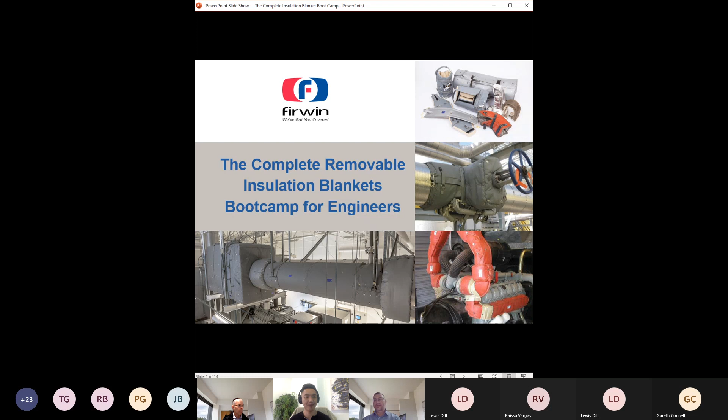We really appreciate you taking the time to educate yourselves in this area. It's not the most glamorous product in the world, insulation. It's the kind of thing that people don't really see. It's best out of sight doing its job, but it's critical. All those who need it understand how important it is on many different levels, and some of those we will touch on during the presentation.

So in today's presentation, we would like to give a general overview of insulation blankets. We're not going to get too much into the technical details. We'd like you to just have a good overall understanding. In the introduction, we will basically be discussing what is an insulation blanket, what is it made from, how's it constructed, just so you have a basic understanding. Some of you may have this knowledge, and I apologize if it's going to be repetitive. It's difficult to aim it at everyone, but we will go through that fairly quickly, and some of the points to consider in an insulation blanket.

We'll then move on to benefits of removable covers. In that section, we'll touch on some of the applications of insulation blankets, what is different about insulation blankets as opposed to other types of insulation. The next two sections, we'll start focusing on what's required to make sure that the insulation blanket that you order will meet your specifications, how to order an insulation blanket, what type of information the provider will be looking for to make sure that it does what it's needed to do, and then we'll wrap it up.

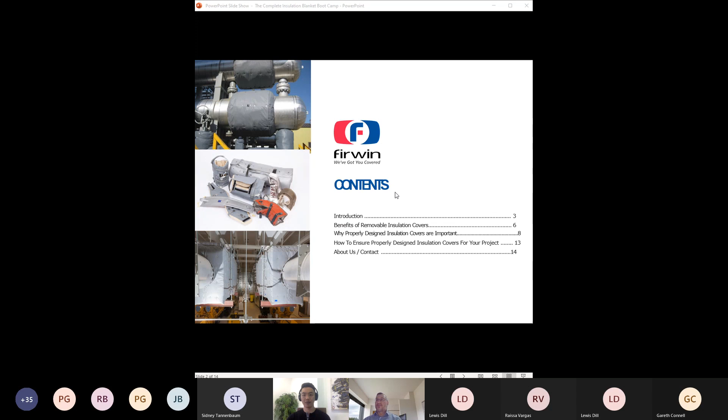Hopefully by the time we leave the seminar today, you'll have a good understanding of what an insulation blanket is, some of the variety that's available in insulation blankets, when to use an insulation blanket, and the type of information that the provider will be looking for to make sure that they can meet your requirements. So without further ado, let's move on to the exciting world of insulation blankets. Okay, let's get started. What is an insulation blanket?

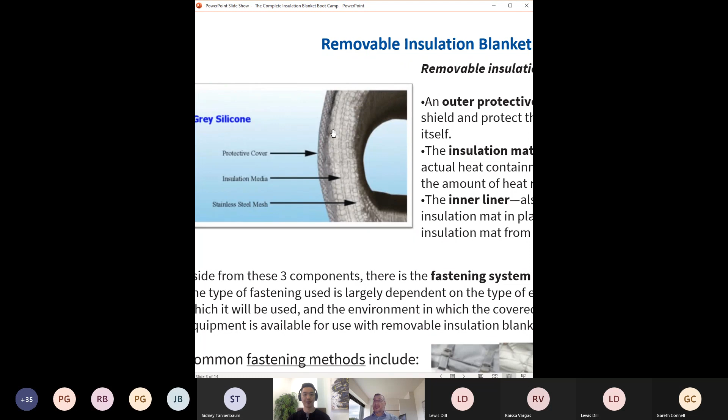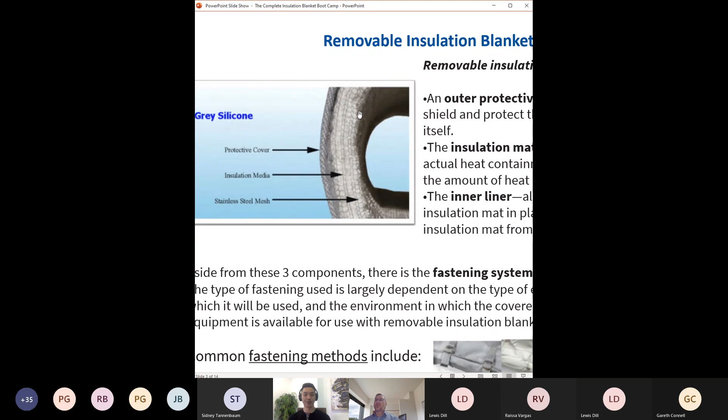So there's all kinds of variety. We're going to focus on what's most common in an insulation blanket, and I'd like to zoom into this visual over here, which gives a good overview of what goes into an insulation blanket. We have the outer protective cover, this gray section on the outside in this photo. We have the insulation material, the actual insulation. Then we have what we call the inner liner, which is kind of what holds the blanket together.

Let's just start briefly with discussing the outer protective cover. There's different terminologies used for these things. It's also known as the cold face of the blanket. That's typically the surface that's furthest away from the heat source, or sometimes could be the cold source, but this is the outside of the blanket. It's designed to shield and protect the insulation, so the main purpose of this area is to protect the insulation blanket.

Some things to take into consideration when choosing or asking for the outer protective cover is, first of all, what kind of heat exposure it's going to be exposed to. Either you're going to have heat coming from the outside, or there's going to be heat that's conducted through the insulation to your outer surface. It's important that that material, as in every component of the insulation blanket, is suitable for the heat that it is going to be exposed to. Other things to take into account: what type of environment is it going into?

Is it going to be wet? Does it need to be able to handle wetness, different chemicals, different fluids? Is it going into a dusty environment where it can become dirtied and has to be cleaned off easily? How much abrasion is it going to be exposed to? How tough and rugged does it need to be? These are all important questions.

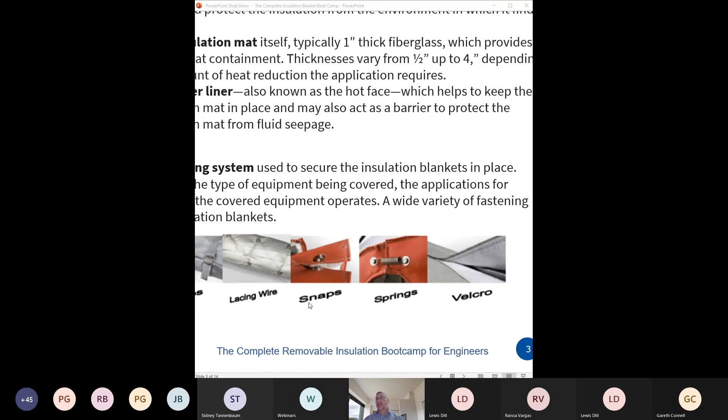And that comes to the last part of the blanket, which is our fastening systems. At the end of the day, the blanket has to be attached to the equipment. So we need some kind of fastening system. Many systems are out there, and Firwin does offer many different systems. Here are some examples. The most common is what's known as lacing wire and rivets or hooks. Essentially, it's kind of like a hiking boot. You just take a stainless steel wire and you wrap it up.

We have straps, snaps like on a winter coat, springs, which is a quick fastening system. Springs attached to one side and you hook it over the other side. Velcro can be used. And again, it's important that the fastening system is suitable for the application. Some things to take into account when looking into what fastening system to use. One is economics. There's a very big price difference between a rivet and wire and a strap, just in terms of the material and the labor required to get that on there.

What temperature is it exposed to? Velcro, as you know, has very fine hooks, which become very heat sensitive. So if it touches a hot surface, there goes your Velcro. You lose the effectiveness of the Velcro. There are higher temperature Velcros. Some of them get very expensive, but that's an important consideration, is the temperature.

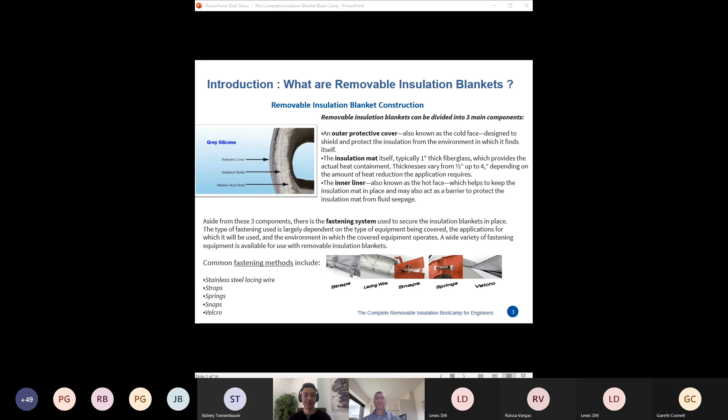The most commonly used materials are fiberglass fabric with a silicone coating. That's great up to around 500 F. So that's high temperature, but not the super high temperatures. That's oil proof, and has many advantages as well. Some of the higher temperature fabrics are no longer oil proof or fluid proof because at the high temperatures, the coatings get burnt off.

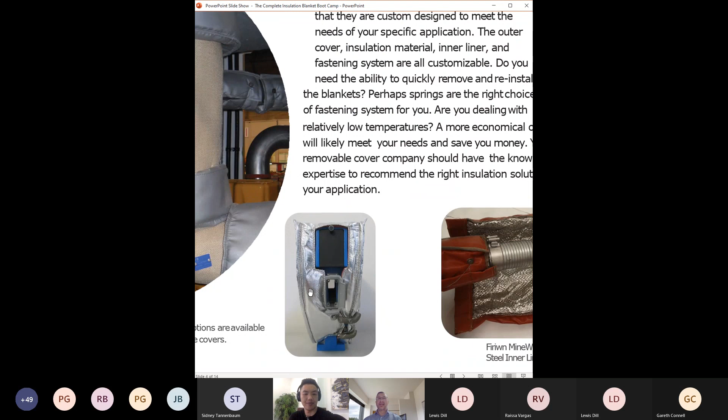Over here, it's maybe not as clear, but this is something that had to look good. Nice metallic finish, eye-catching, great for special applications where you may have customers who just want to have something that's going to look good, high-tech, eye-catching.

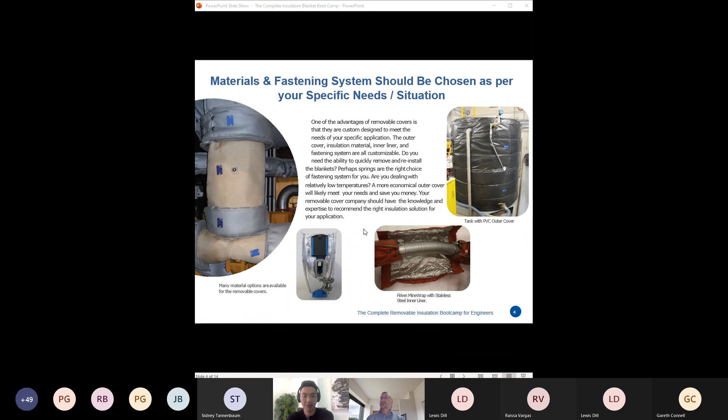Okay, so that's the introduction, just to give a basic idea of what an insulation blanket is and some of the considerations. So we're going to move now to the next section, the where and the why of insulation blankets. What applications are they used in? And the next slide, how's this different than other insulation?

So in a nutshell, insulation blankets can be used wherever any other insulation is used. There's nothing that different about an insulation blanket compared to the most common type of insulation, which is cladding. At Firwin, we commonly use it on the full exhaust of engines, including the turbos, the really hot components of the engine. Here we have a picture of the silencer, Y collectors, flex joints, the full exhaust system, right from the engine turbo all the way out to the exhaust. That's the high temperature applications.

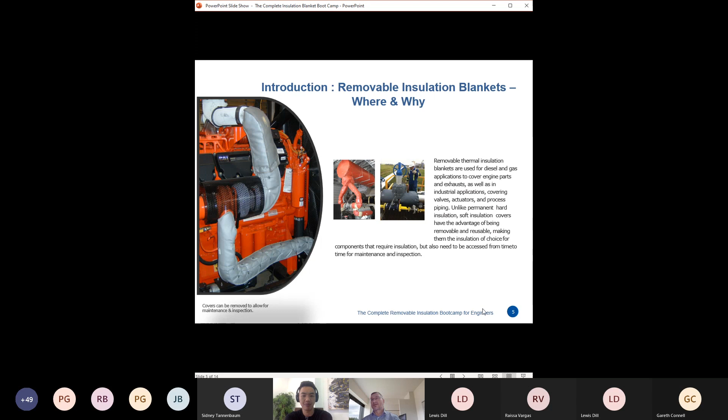Then we have the lower temperature applications, which would be valves and process piping. There, the insulation is used typically to prevent freezing and to maintain production temperatures, optimum temperatures for performance. So there's really no limit. We've used it pretty much anywhere one can dream up where insulation can be used. We've seen that and custom made the product for that application.

So what is really unique about an insulation blanket? When would one use an insulation blanket? When would one maybe not use one? Again, the primary alternative to an insulation blanket is what's known in the industry as permanent insulation or cladding insulation. Typically, that would be installed by an insulation contractor who would come to site and install that insulation.

So let me briefly go through some of the advantages of each one, so you know when you want to use the insulation blanket and when you want to use cladding. So what are some of the advantages? Let's start maybe with the permanent insulation, the cladding. I'm not here to twist everybody's arm to always use the insulation blanket. Everything has its right time and place.

Cladding is useful on large scale projects where you bring in a whole insulation crew and they'll put it on. You don't need to provide any kind of information. They measure everything on site and put it on site. No manufacturing is required beforehand. It shows up with the raw materials. For large projects, it's certainly more economical, and larger scale work is typically done with permanent insulation.

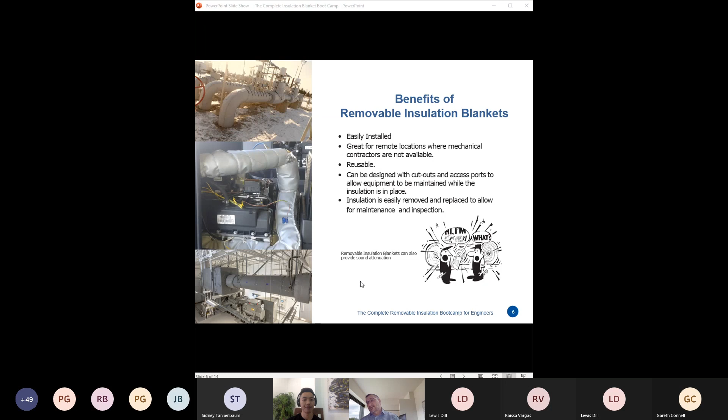It is turnkey, so it can be designed to accommodate all the, which we'll speak about a little bit more soon. But the insulation blanket can be customized so that no cutting back and changing the blanket on site will be required. Sometimes cladding requires a very high skill to shave down the insulation and make it suitable for that application. So those are some of the places where you'd want to use an insulation blanket. Typically it's because you're going to want to remove it, sometimes permanent as well. That's an overview of some of those areas.

Never forget that the insulation, as we mentioned above, is a critical component. It's important for safety. Here in the top left, we have an application that was a hot system at ground level. Very dangerous for people passing by. This is an underground truck. Again, underground, they don't have any flexibility when it comes to safety. They cannot afford to take risks.

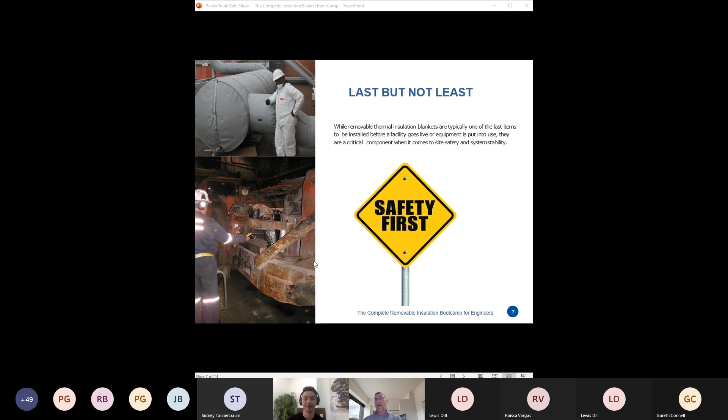You can see over here, it's a bit difficult, the insulation there. It has to protect the equipment. There, the main concern is fuel leaks and often working in tight environments where there's a high danger to personnel. So it's not always about safety with insulation blankets. Often it's about efficiency, heat conservation, but safety is obviously always going to be a very critical consideration. So that just summarizes the area about insulation blankets, how they're different than other insulations, when they're used, and why use an insulation blanket. I'm going to now move into the next section of the presentation.

And that is, how do you communicate with your insulation provider to give them the information that they require? I know at Firwin, we take pride in giving our customers what they need, what they want. But in order to do that, we need to get information from the customer. So we'll just spend a little bit of time focusing on that. How do you contact us or a different provider to get them information?

Things have changed a lot in the last 20 years. When I started at Firwin, they were still using the instant cameras, the Polaroids, where they would print pictures and send you a photograph in the mail, fax machine. So a lot's changed, obviously, over the last 20 years in our industry as well as your industries, every industry. Today, the best method of communication to get what you need is CAD drawings. Depending how complex, 3D CAD drawings, 2D if it's a simpler application. That gives us the information we need, especially with 3D.

But even with that, photographs are always a good idea. Sometimes we actually do design before the equipment is even made, so we don't have the luxury of photographs. But even with CAD drawings, a photograph can tell us a lot of information that even the 3D model won't. Just in terms of environment, we can sometimes pick up things that even the CAD drawing may have missed.

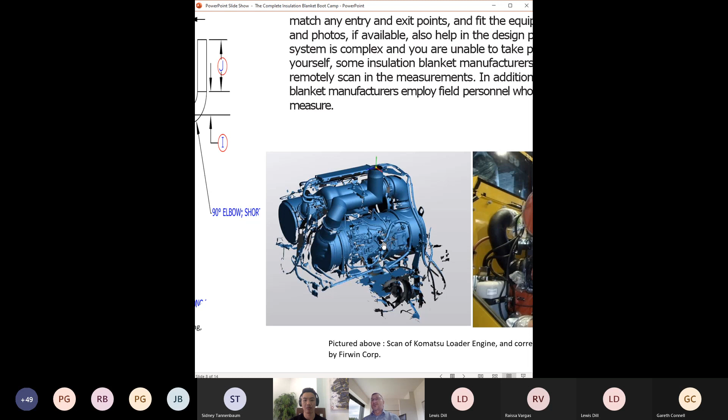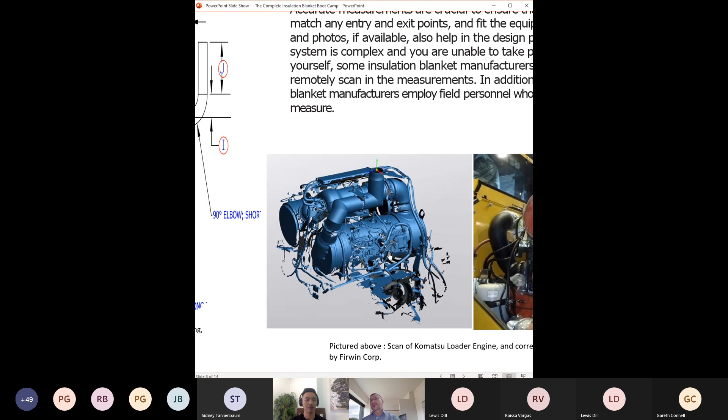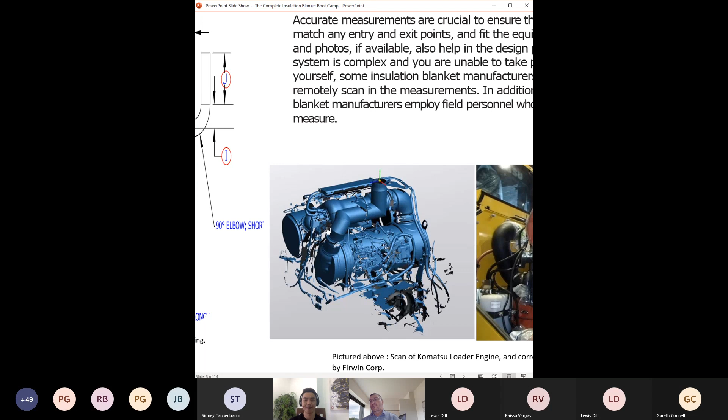At Firwin, as shown in this picture, this is a new technology that we've been working with, and that's 3D scanning. So you can see over here, this is a very complex piece of equipment with all kinds of thermocouples and electrical fixtures and all kinds of complexity there. And even if we went to site, it would be hard to really measure this accurately enough to get a good fitting blanket. If the vendor had good 3D models, that would have been a good solution. But even a 3D model won't necessarily have this level of complexity to it; that would be a very expensive 3D model. Sometimes they would, sometimes they don't. So we work with 3D scanning. That's a new technology that's available to us.

We can either come and do the 3D scanning ourselves, or if it's a far removed site, most major cities have services that rent out 3D scanning capabilities. It's pretty cutting edge. A lot of providers will not have the expertise to deal with the 3D information that comes from the scan. We've done some very successful projects using this technology, so that's another method. At the end of the day, I know with Firwin, if you just can't figure that out, you have a need, you have to insulate it. How do you get the information? There's always the old-fashioned thing that's called the telephone. We've become pretty successful at working with customers to figure out how to get that information when coming to site is not practical.

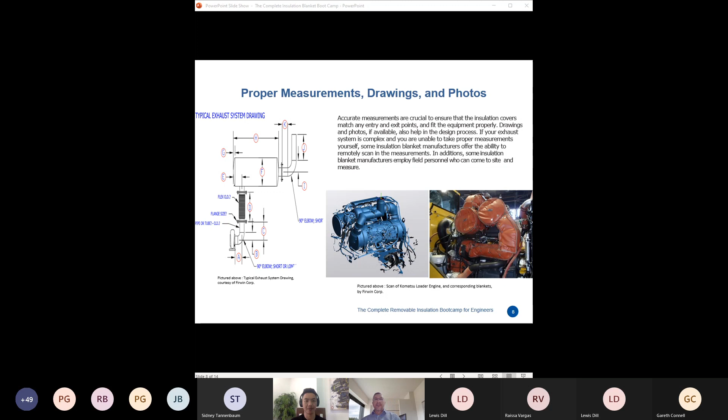Okay, so what kind of information do we need in terms of detail? So we need to know about not only the component itself, shown here. The muffler is a relatively simple geometry, but support brackets can get in the way of the insulation. Sometimes a nameplate has to be exposed on a component. Sometimes we need to know thermocouples that have to get exposure. So the application will determine how much detail we need to know. If it's just heat, let's say burn protection, we don't necessarily need to know every detail of the item. We need to know the surface that is exposed where people can touch. That's how much detail we'd need to know. We wouldn't need more detail than that in that application, but some applications we would need that level of detail.

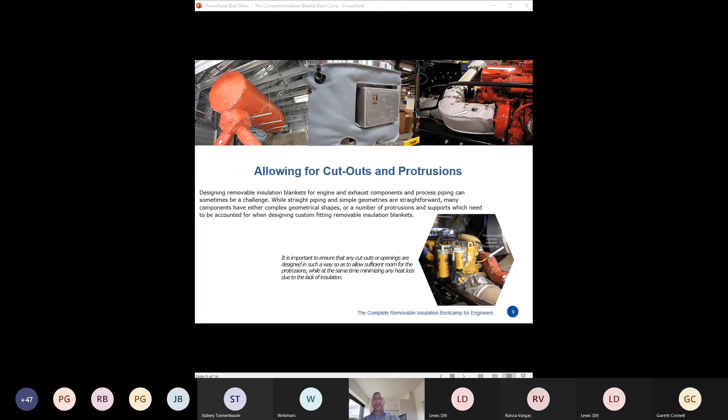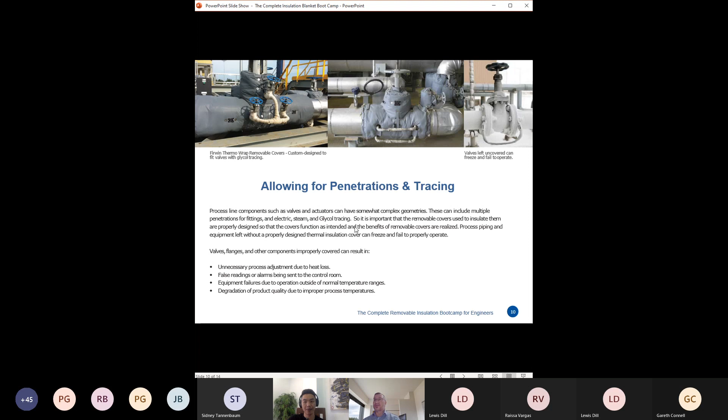And in these applications, sometimes it's critical for the process to maintain the heat, that it's very thoroughly insulated. So we need to be very particular in how we get in there to make sure that there's no heat or minimal heat escaping, so that the operations and the piping, whatever the chemicals or whatever it is, can function optimally. That's also very important in heat extrusion, plastic extrusion, when they need to maintain constant temperatures in the system to make sure that their extrusions are working well.

Another important thing to notify the vendor: what's the environment? Is it outdoor? Is it indoor? Is it a touch-safe critical application? Are you looking to minimize how much heat loss there is, again, to maintain process temperatures? How much heat can you afford to lose? How much heat do you have to contain? That's an application where the provider, especially if they're more technically adept, if they have technical people, engineers and staff, they can help determine how much insulation is required in order to contain enough heat to achieve your goals.

This application over here is an SCR system outdoors. They need to maintain enough heat in this system in order to burn off the exhaust pollution. Important to know that. If I zoom in here, you can see this is an outdoor application. It's important to know it's outdoor. We will design that with flaps over here to minimize as much precipitation getting into the insulation.

In a removable blanket, we can never really achieve 100% waterproof. But for most systems, if a little bit gets in, it evaporates out, especially in a hot system, or it drips out the bottom. It can be designed for that to make sure that there's no pooling of the water. These are important things for us to know so that we can design appropriately.

Again, does it have to look good? Right? If it's a high-end building and you have customers walking past there, it cannot be an eyesore. Always good to let the provider know that, so they'll take a little bit more attention into what it looks like. Obviously, the more information about the application, the better. It's easier to get it right when we're informed about what's required.

But also, does it need to be fire protective? Not all insulation blankets will protect in the case of a fire. I'll show you some more details about that soon. That's another thing we'd need to know. Is it just heat insulation, or is it also fire protection? All important questions to tell us. Firwin does have a fire protective cover. It's been tested to the UL fire test, which is UL 1709.

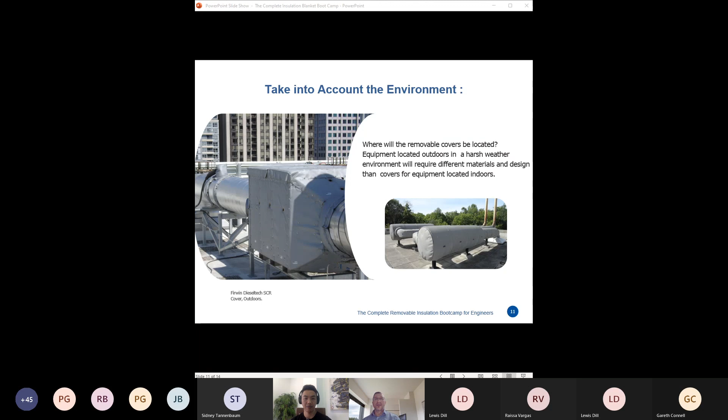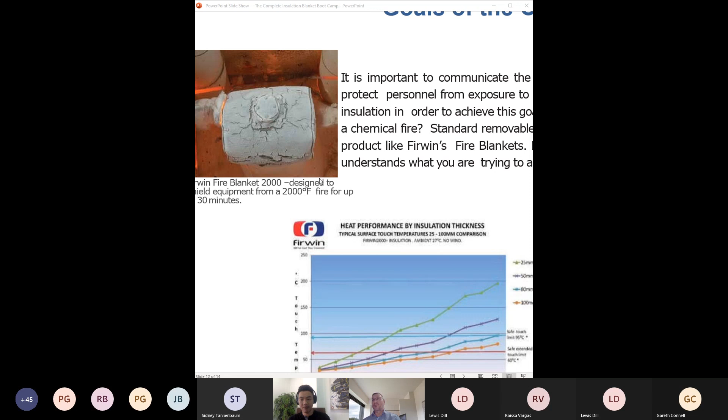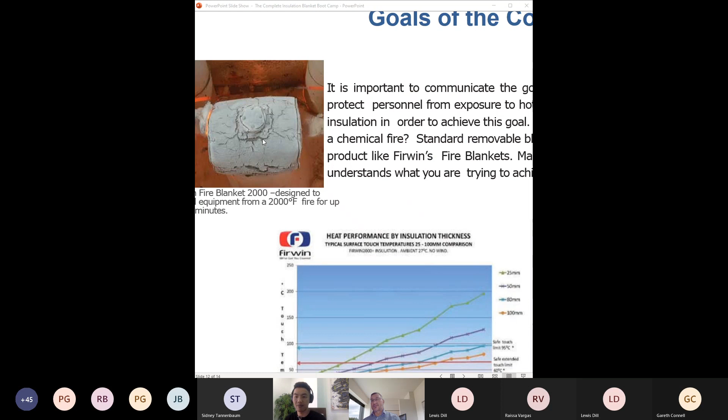Most commonly used in valves and actuators, where if there's a fire in a plant, the fire will eventually destroy everything, but they need time to turn off the chemicals or dangerous or flammable fluids. They need to close those valves as soon as possible. So they need the insulation to protect them while they shut off all their systems. It looks pretty burnt up, but this outer surface is really just a sacrificial protective layer. The insulation was still intact underneath there. But that's important to know if that's the application.

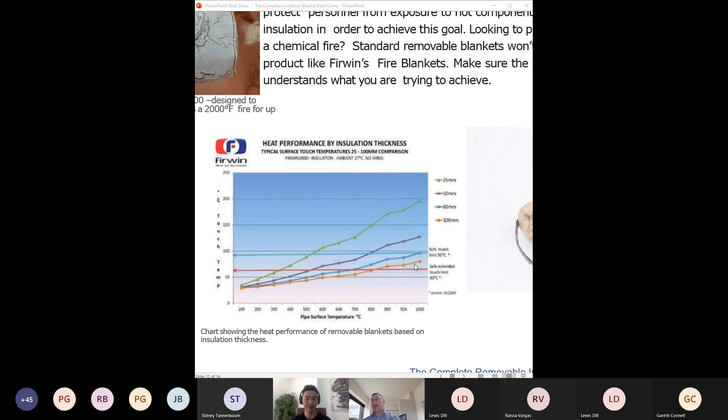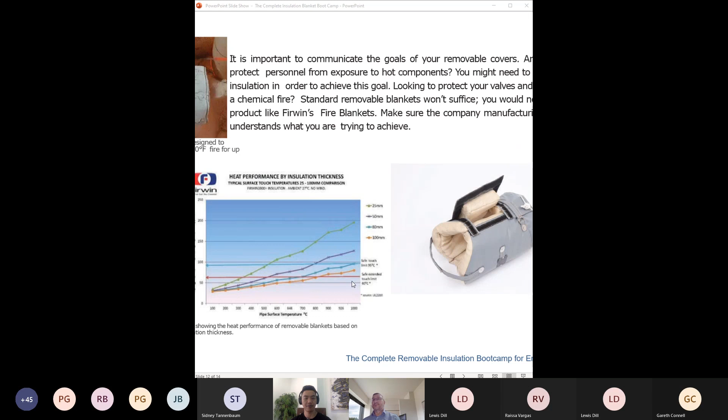Touch temperature: you have to reduce your touch temperature down to safe touch. So over here, we can chart out different types of insulation, different thicknesses, how much is required to bring it down to a safe touch temperature. Safe touch is defined by different standards organizations. UL has very specific touch-safe temperatures that we can work towards and engineer the blanket to meet. So the more we can know about your application, the better, and then we, or whichever vendor you're working with, can give you what you need.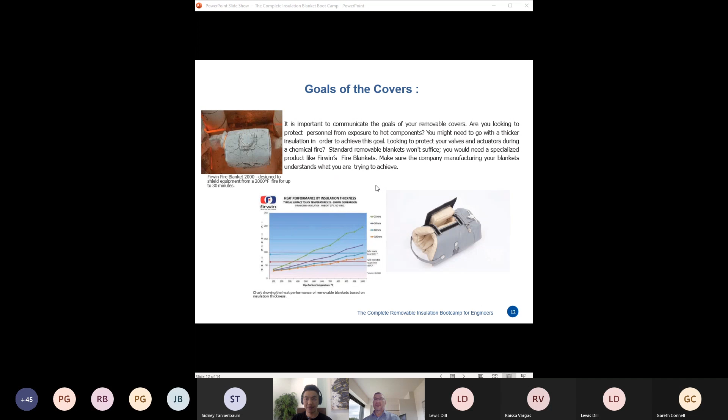So that wraps up the technical side. Just a brief overview of an insulation blanket. I hope it's been helpful. Just a little bit about Firwin and the type of...

Before that, Brett, we have a few questions that came in here. Right. Yeah.

Question here came in: are you able to apply insulation jackets to -40 Fahrenheit valves without the problem of condensation? That's an excellent question. When we get to the cryogenic temperatures, the blanket definitely has to be engineered to avoid that happening, to avoid the freezing, so they have to be sealed as best as possible. Usually it doesn't have to be a 100% seal. We've done some applications where we've been successful, but you have to fill in some of the spaces and openings much more effectively than you would with other more ambient or hot temperature applications.

So we have worked in cryogenic environments. It's challenging, and special materials have to be used. Some of the regular materials that we would use would just crack at those temperatures and not be effective. So again, we'd have to know that it's going into that kind of environment, and there are some cases where a blanket cannot be used.